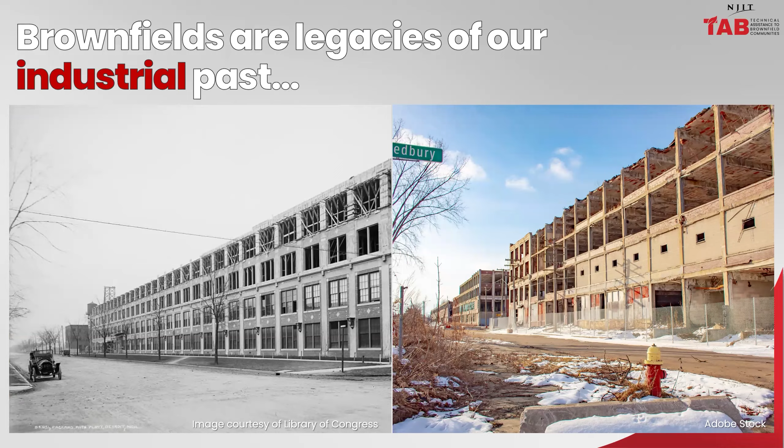Brownfields are legacies of our industrial past. Typical brownfield sites include historic factories and warehouses, former textile mills, mills and foundries, rails and freight yards. That said, non-industrial brownfield sites can include closed gas stations and auto repair facilities, former dry cleaners, and dump sites. These smaller businesses also use and handle chemicals. Buildings can also be considered brownfields based on the nature of the materials used to build them, such as asbestos or lead paint.

Let's briefly talk about the negative impacts of brownfield sites, outside of the potential presence of contamination. Of course, environmental exposure to contamination can degrade soil, water, and air quality, and human exposure can potentially cause public health issues. But brownfields can also contribute to neighborhood deterioration and negative perceptions of the neighborhood. They can attract vandals, open dumping, or other unwanted criminal activity. They can lower property values, reduce employment opportunities, and lead to lost tax revenue and limited economic growth.

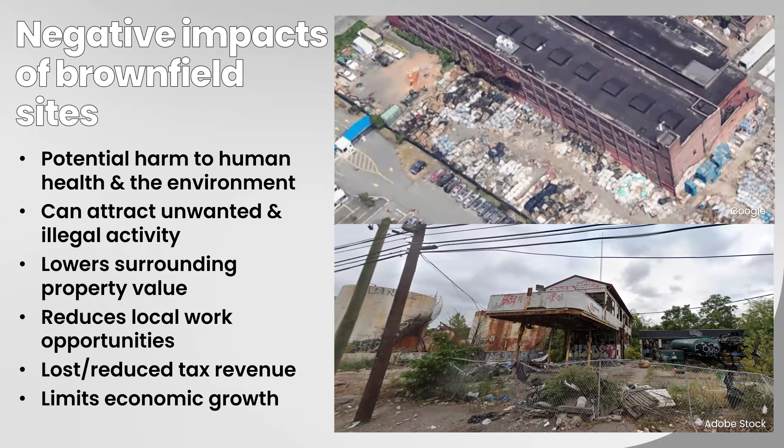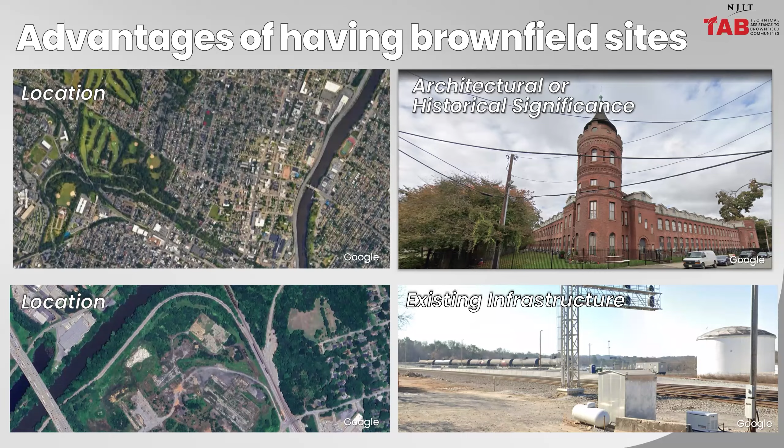Most of all, brownfields hold the potential for being transformed into community assets. Remediation and redevelopment of brownfields present us with opportunities for renewal.

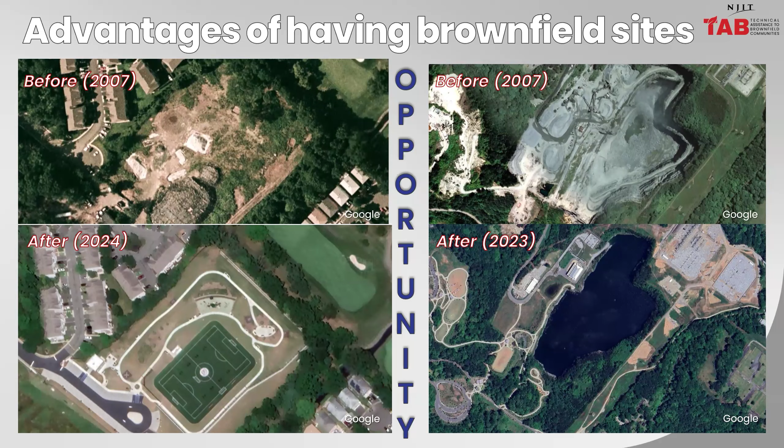A greenway is generally a linear park or open space corridor that links natural, cultural, and scenic resources. Greenways are found along rivers and on former rail lines. In addition to conserving land, greenways can also promote recreation through walking and cycling that encourages folks to get outside and be active. Environmental benefits of greenways include improved air and water quality. Rails to Trails projects, which convert abandoned rail lines into recreational pathways, are popular across the country.

To tell us more about their Greenway projects, let's kick this conversation over to our panelists.

It's my pleasure to briefly introduce today's panelists in the order that they will be presenting. Julia Wong works in the Office of Urban State Parks and Initiatives at the New Jersey Department of Environmental Protection, where she manages and supervises the planning, design, and construction of the state's newest park, the Greenway. Additionally, Julia supports the Liberty State Park revitalization efforts.

Christine Hassell is the Chattahoochee Program Project Manager for the Trust for Public Land. Currently, she is managing the development of the Camp and Paddle Trail, connecting 48 miles of the Chattahoochee River through 5 sites. When complete in spring 2025, the trail will provide a unique 4-day, 3-night recreational experience through the southern Atlanta metropolitan area.

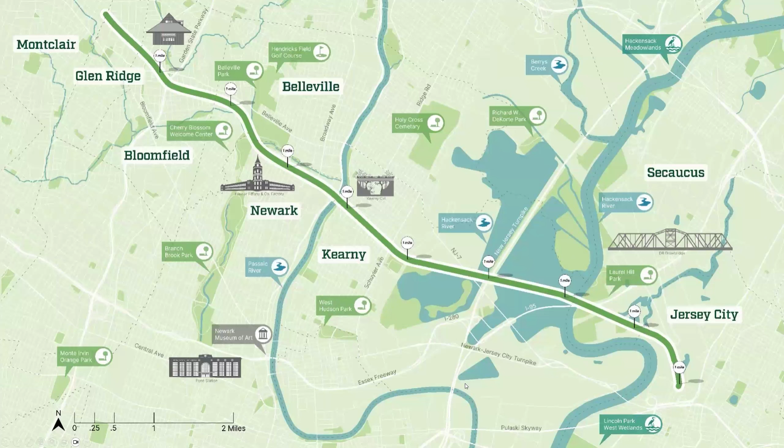To ground you a little bit to where we're working right now, the Greenway Future State Park is converting an old rail line into a greenway, as Carrie mentioned. From west to east, it'll run about 9 miles through 2 counties and 8 municipalities. In total, once we rebuild and remediate everything, we're looking at approximately 140 acres of brownfields to be transformed into open space for active and passive recreation.

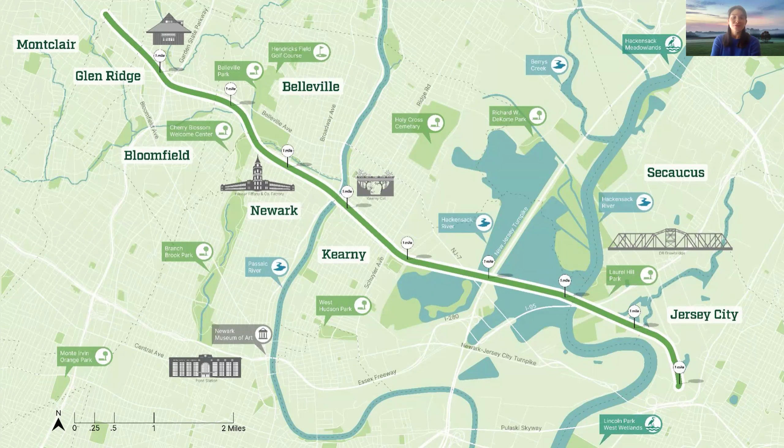This area specifically will serve 1.5 million people directly in the immediate surrounding area. But like all of our beloved state parks, we expect many more visitors to come. These 2 counties are among the most densely populated areas in our state, and New Jersey is the most densely populated state. Between the outdoor recreation and alternative transportation opportunities this will offer, we will service over 16% of New Jersey's population within the immediate surrounding area. Also, this brownfield redevelopment will serve as a catalyst for both environmental improvements and economic development in all of the adjacent communities.

So quickly, a bit of our history. DEP purchased this alignment from Norfolk Southern in August of 2022 for just over $60 million using a combination of federal and state funds. This absolutely would not have been possible if it hadn't been for all of our partners working on this, advocating for it for years before we were even involved. From local politicians all the way up to the state level, we have nonprofits, philanthropic organizations, local businesses, anyone you can name, even the Girl Scouts, clamoring for something to be done with this brownfield site to redevelop it into an asset. So we were blessed with the opportunity in 2022.

We very quickly got to work in 2023, starting research, analysis, and our initial engagement. From that work, we came out with 4 reports: one focused on remediation, another on stormwater, one on safety and security, and the last one focused on phased development for how to tackle those 9 miles while staying actively engaged with all of our stakeholders and communities. Building from those 4 reports, we ended up picking what will be phase 1 and moved into design and engagement at the end of 2023, which is where we are now.

Engagement continued throughout that process and still actively continues, though we're at a bit of a pause as we, fingers crossed everybody, hopefully break ground this summer. Very excited for this to start taking place. As of now, we're expecting it to take 15 months to complete what will be phase 1.

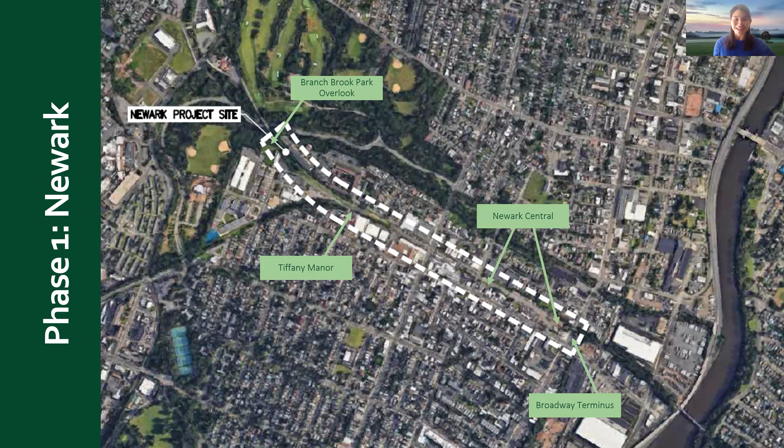Going through there, we've got a quick look into what is leading into our design ideas. As this was a former rail line, we wanted to keep the history of its decades of use and pull from the actual site itself—looking at the rail ties, the Corten steel, and the fact that as a rail line it carried ice from farther in New Jersey into people's homes in the pre-fridge and freezer days. From that, we developed a design language marrying ice, rails, and ties with the interplay of how humans and nature always interact, because you cannot separate the two.

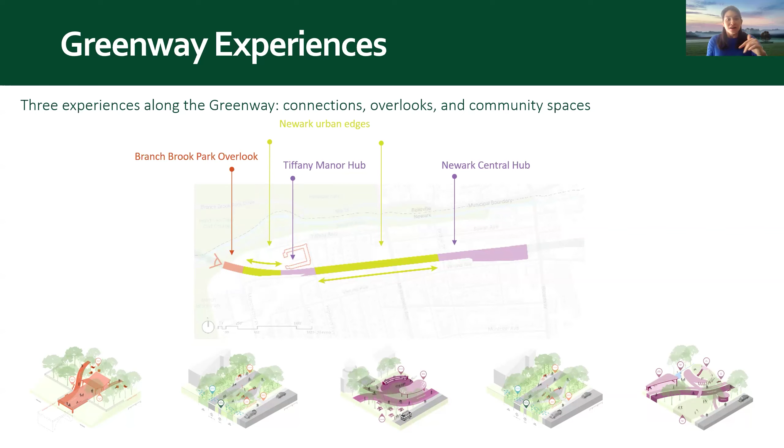With that, we created a series of Greenway experiences: connections, overlooks, and community spaces. I'll move into these a little more closely. Connection is exactly what you think of when you think of a trail—not to put too fine a point on it, but it takes you from point A to point B.

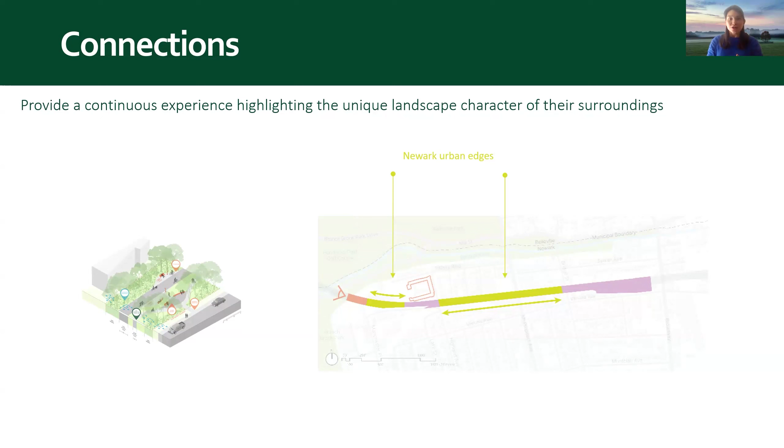And while there is intention in the design, it is largely one shared use path for bikes and fast moving people who run significantly faster than me, and a slower moving path for where I'll be hanging out, walking slowly with my dog. That's not to say there isn't other investment - there's stormwater management, reestablishment of local vegetation, flora and fauna, but it is largely a connector.

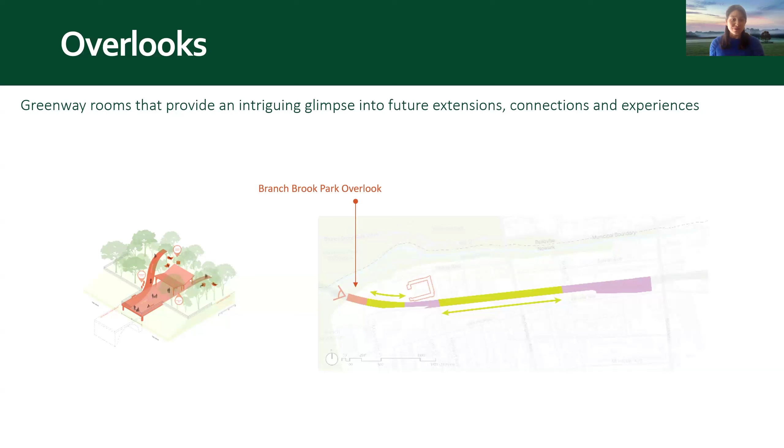The purple side are community spaces, of which phase one has two. Tiffany Manor would be that building that Carrie showed towards the beginning, and we heard from tons of local people that they needed a place where they could hang out and grab a coffee with their neighbors, sit down and enjoy the day before it gets started. It's a wonderful little hub of a space that connects a deeply residential area with a local supermarket, an elementary school one block off the road, and is incredibly well traveled.

Farther east, we have Newark Central Hub, which is by far and away the biggest investment we will put in for the entire Greenway. You can see how much wider it gets the farther east you are, and then it substantially narrows again for the rest of the Greenway. So that is our biggest opportunity for all sorts of programming - social, cultural, and recreational.

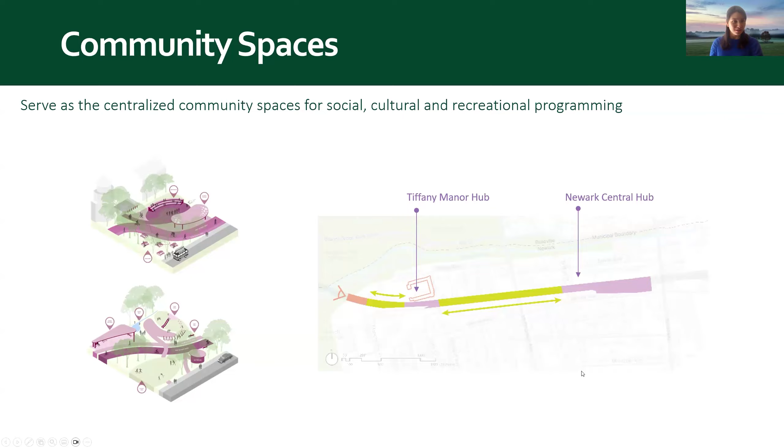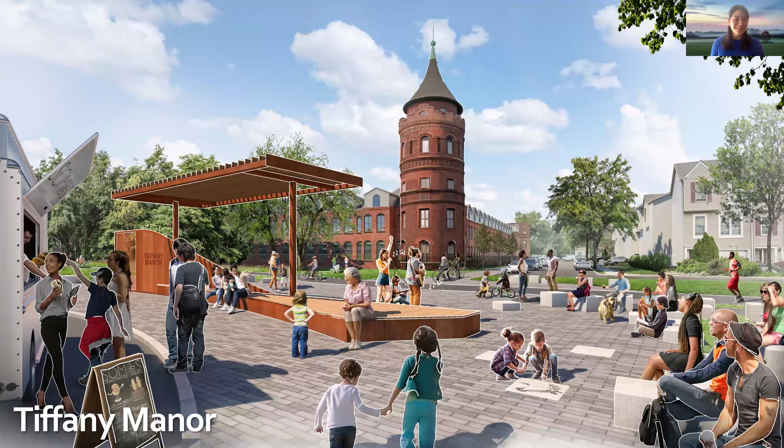Our next rendering is of Tiffany Manor. That iconic building is Tiffany & Co.'s old sterling silver factory - they manufactured silverware there for the longest time, and it's since been converted into lovely residential apartments. I would love to go into that turret - maybe one day I'll get an invite. But as I'd mentioned, this is an area where residents really wanted a place where they could come and sit down before they start the day, or come and take lunch, that sort of thing.

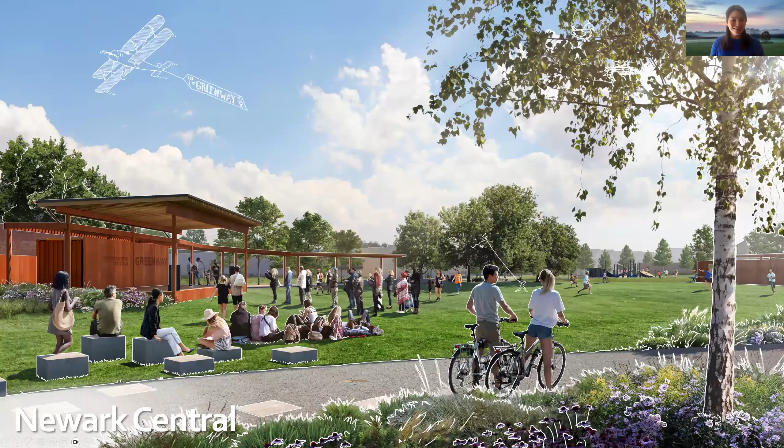And then Newark Central - this is one of many renderings that we have, but I had to pick one. A view of what we've been calling the Great Lawn, and the seating capacity, depending on what studies you're looking at, it either fits a couple hundred people or up to a couple thousand, depending on if it were a more concert style thing with a stage as well. So think local programming - that could be a Friday night concert series if the city would like, or the community would like. You could lead yoga classes or just picnic out there with your family all day, which is amazing.

But because Newark Central is so vast, I included a couple more renderings of other things that are happening in the area.

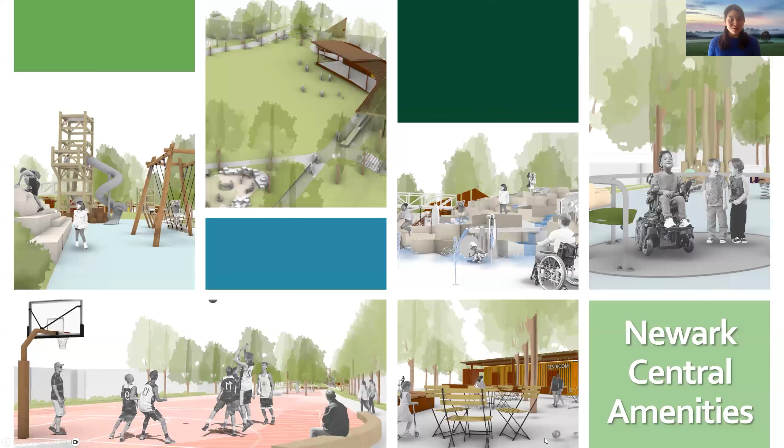So we have two separate play areas, one designed more towards older children, ages 5 to 12, and then younger kids 2 to 5. All of the design features are lovingly, painfully designed to keep in mind the old rail and ice infrastructure. That's an old ice tower we're trying to model for that climbing feature with a slide. There's also, connecting those two play areas, a climbable water play feature where kids can redirect water streams. All of the climbing blocks are modeled after the ice blocks that the rail line used to carry. There's also a series of sports courts, workout stations, an area for a future community garden, picnic grove, restrooms, all that sort of thing. Really, really fun - a lot of thoughtful design.

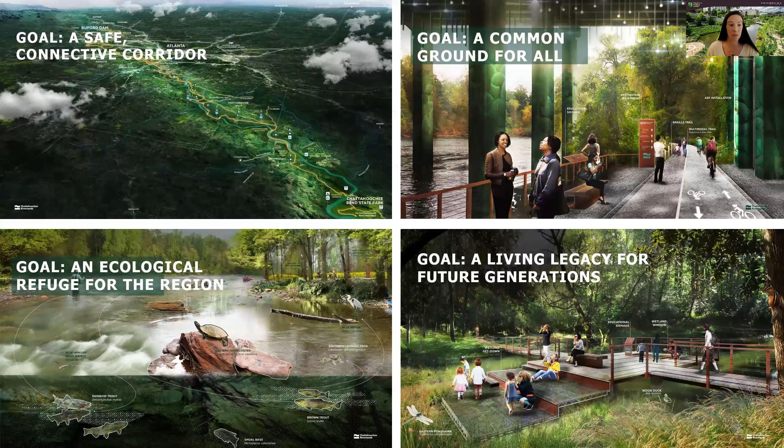That got us to identify 4 goals along the Chattahoochee Riverlands: to create a safe and connected corridor, to create a common ground for all, an ecological refuge for the region, and a living legacy for future generations.

These 4 goals informed the vision then, and they still inform all of the decisions that we are making today during implementation.

So what is the Riverlands really? The Riverlands is the Greenway, which is really what I'm here to talk mostly about today. Think of it as a 100-mile linear park, if you will, but it's the Greenway. So this is the trails along the river, one side or the other, sometimes both, and then the destinations that the Greenway creates, that those trails create.

The Blue Way, thanks to Mother Nature, was actually an easy one to check off as complete. The Blue Way is the river itself, a Blue Way trail along the river. The Riverlands identifies more places to access throughout the 100 miles. The tributary trails are essentially the trails that get folks from where they live and work to the river to play and recreate. So all of that makes our Chattahoochee Riverlands.

This study was published in 2020, and the full alignment is 125 miles of trails, 25 river crossings, 44 tributary trails, just a lot of access to this terrific natural resource. And so far today, since the published study in 2020, we have tracked over $267 million that have been invested or committed to the Riverlands projects. These are 2024 numbers, so we don't even have any more recent figures, at least not in this version of our graphic.

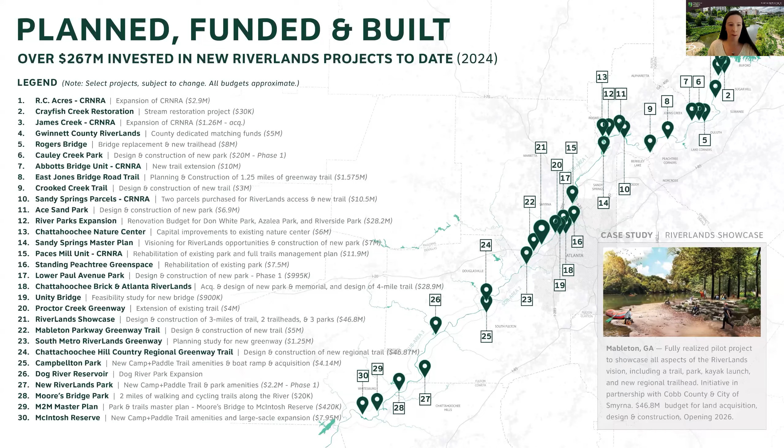So I'm going to focus a little bit more now on actually building the Riverlands and getting us closer to seeing this vision realized. As you can imagine, not everybody can flip through a book or talk about a vision and knows really what that looks like on the ground. So here in Georgia and in the Atlanta metropolitan area, we do talk about the Riverlands trail portion, the Greenways, as the BeltLine, but on the water.

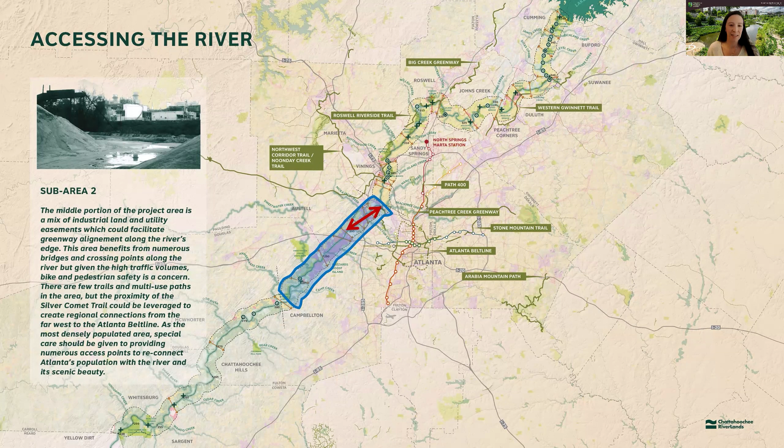It's the highest impact of creating the trail network and park along this section of river, and a lot of these sections are not heavily funded as well. So Trust for Public Land, along with a multitude of partners, are working on this section of the river. And then the City of Atlanta, our terrific partner, we are focused on our Cobb County side, our City of Atlanta side, and some of our jurisdictions a little bit farther south. This urban core has a large industrial use along this section of the river, very urban, a little gritty.

Historically, people turned their back on the river in this area, and most of these industrial sites were just dumping into the river. That's part of the reason that we ended up having one of the most endangered rivers in the United States. Now, the trend is seeing a lot of these industrial sites turn to residential, amenity, or park use. So we're seeing a lot of that already happen.

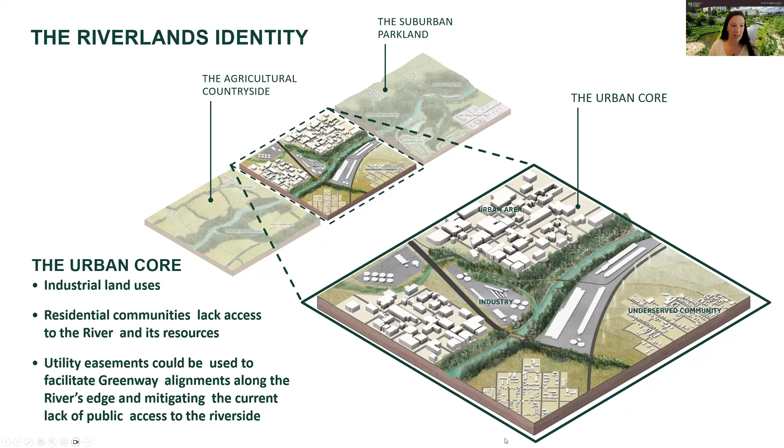But in some areas, there still is a lot of fencing and utility corridors that people cannot access, a lot of rail lines to get across as well, just to get to the river, which you can see, but you can't actually access. So this is our focus study in the urban area.

One of the primary locations that Trust for Public Land has been working in, we call the RiverLands Showcase Project. It is about 3 miles of greenway, anchored with a park and trailhead at the north end and a park and trailhead at the southern end that you can see here.

This project will be complete—we are underway, it will be complete in 2026. As I mentioned, it's about 3 miles of paved trail, providing access for everyone so everybody can access the river. The wonderful thing about this, it runs through Cobb County, City of Smyrna, and Mableton, connecting 3 jurisdictions directly. And we're able to utilize the utility easements and corridor through a lot of this, which makes it a lot easier to get access through this section of the river and build out beautiful trails.

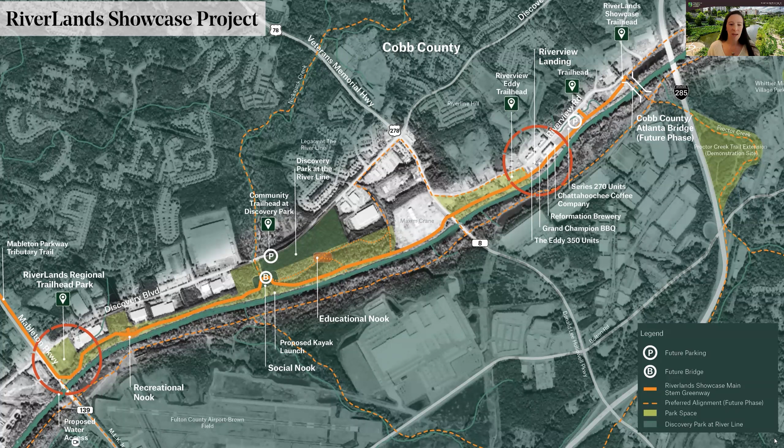As I mentioned, we are looking at sections where we get the highest impact for the investments that we're making. This showcase is located near 44,000 Metro Atlantans. We've already conserved and activated hundreds of acres of land along this stretch.

And we've seen a lot of community volunteerism, bringing them to the river to help us remove invasive species, to talk about the river, to talk about stewardship, but also to help build the investment here to date. So far, we have received over $26 million in public funding and a philanthropic investment of $23 million committed by TPL. And again, this project has started opening.

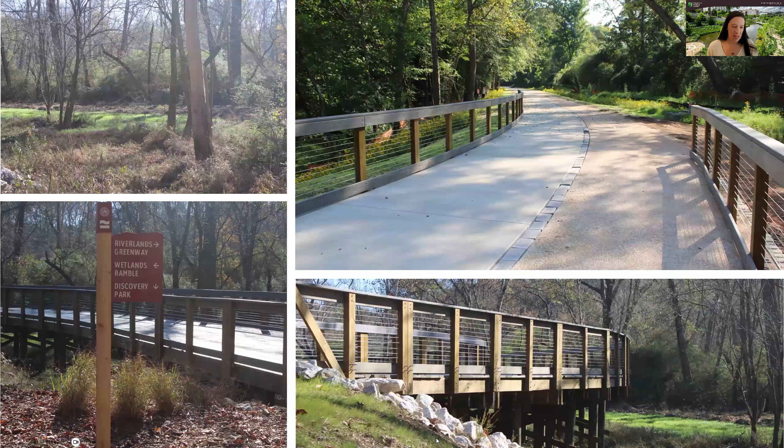Let's see, and then just some more photos where the trail comes together. This is actually a bridge in the top right, and through most of these photos you can see the boardwalk that runs over the wetland that is also being restored at this site as part of that ecological refuge for the region.

All right, so I'm going to turn your attention to the other side of the river, which is Atlanta's waterfront. TPL is working with the City of Atlanta and a lot of other partners to make progress on Atlanta's 5 miles of riverfront, which has been called the Atlanta Reach.

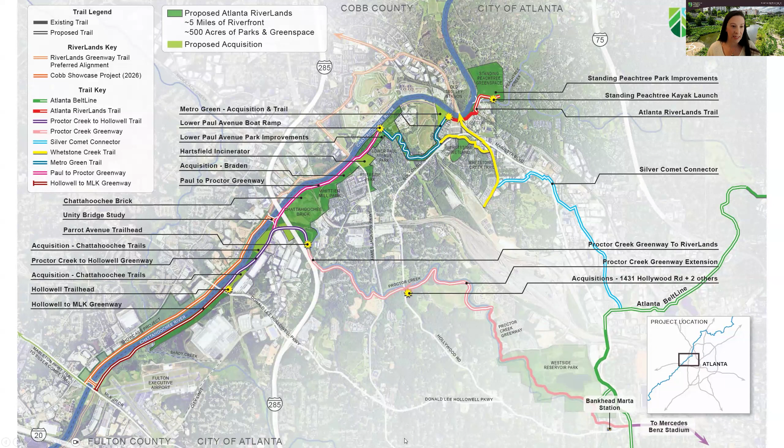So I just want to highlight quickly, if I can, I'll try and get through these slides. Again, the Atlanta RiverLands trail design is underway for this 5 miles. Very excited to see this moving forward.

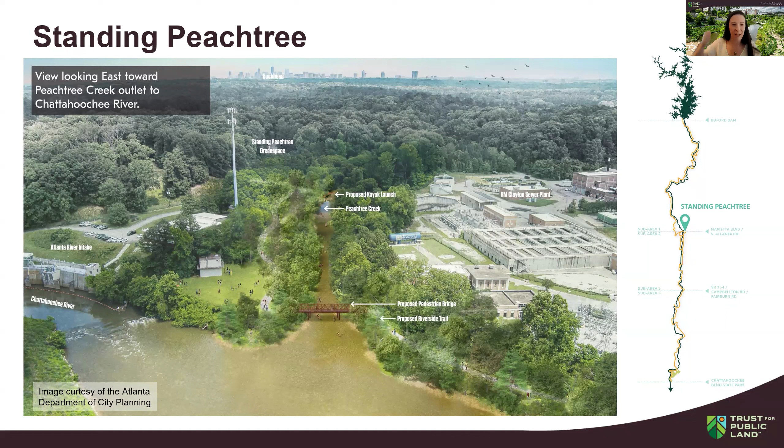Standing Peachtree, as I mentioned, this is looking from the river up Peachtree Creek, which is the confluence of the river and Peachtree Creek, and you can see the city skyline in the background. There's the kayak launch, and then the trails coming online in the near future - there will be a bridge over Peachtree Creek connecting residents of the city of Atlanta to the riverfront.

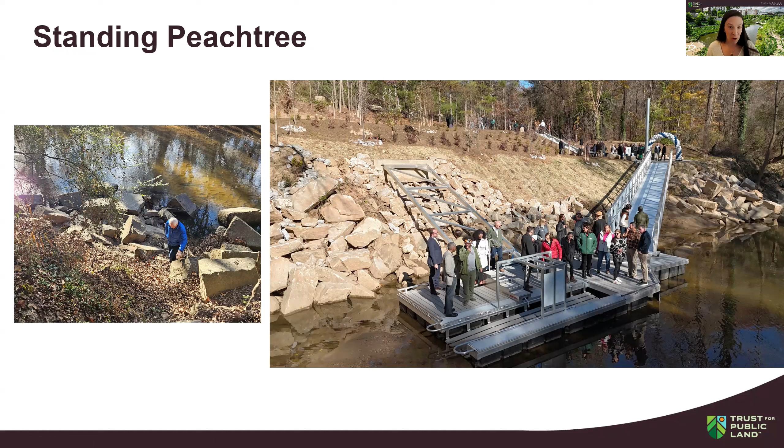So again, this connects everyone and makes sure everyone has access to the outdoors and to the river via this access, no matter your age, your ability, your race. This really gets everybody down to the water, or in the water if you want to paddle a boat or a canoe. And then again, this trail looking down with the city of Atlanta behind.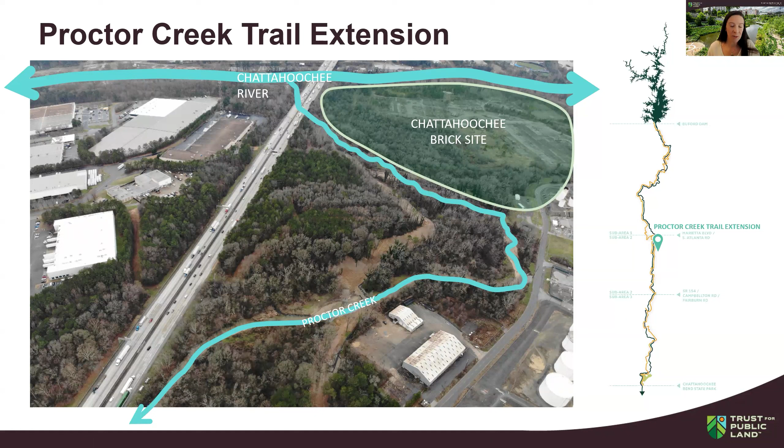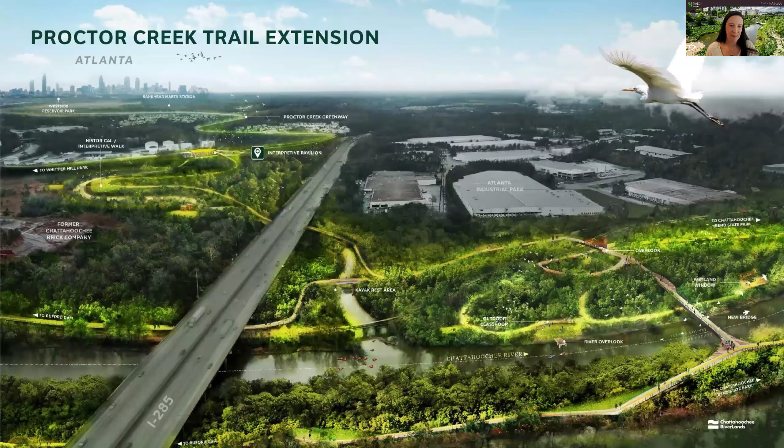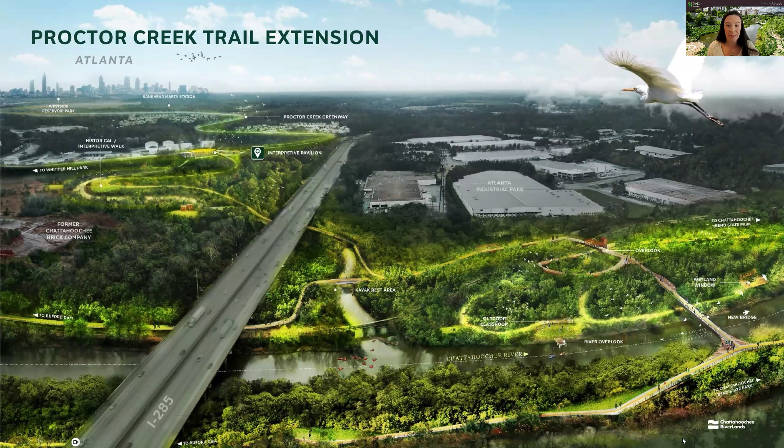So now we flipped it from how I first oriented you to the site. The river is at the bottom, that's 285 running bottom to top, and then Proctor Creek snaking through with a bunch of trails, a beautiful rendering of what we can really do with these sites and this great partnership that Trust for Public Land and the City of Atlanta have been able to create.

I just want to highlight again, this is the last rendering I'll show and then I'll pass it off to Jessica. Really, the Chattahoochee Riverlands, we see it as on track to become one of Georgia's defining public spaces for generations to come, drawing a regional audience and connecting millions of people with a vital natural resource. Greenways along 100 miles of the river, it's going to be quite lovely. We would not be able to do what we're doing without the amazing partnerships that we have, and I'm going to hand it off to Jessica, as she has been a terrific partner in making progress on this.

Thank you so much. My name is Jessica Lavandier. I work with the City of Atlanta Department of City Planning and the Office of Zoning and Development, and I manage the Brownfield program. Let me see if I can move this down.

So as I mentioned, I manage several EPA grants: Brownfield grants, revolving loan fund, where we provide financing for brownfield remediation by providing a loan or sub-grant to remediate a parcel; assessment grants, where we conduct a phase 1 and phase 2 environmental assessment and cleanup planning for parcels; and a cleanup grant, which is for a site owned by the city, in this case our Chattahoochee Brick site.

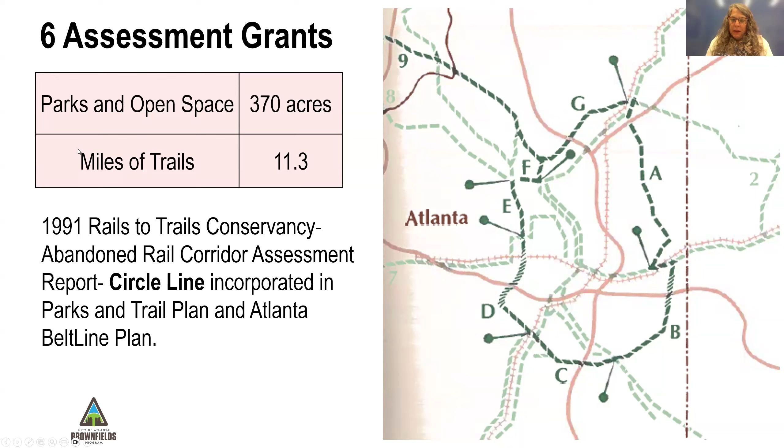That was incorporated into our Parks and Green Space and Trail Plan, and later into the Beltline Redevelopment Plan. An agency was created to implement and build the 22 miles of trails around the city. Our Brownfield program was starting around the same time, so we did a lot of work along the Beltline. I have 3 projects to focus on to show you.

The next one is a gas station. We conducted a phase 2 environmental assessment on a gas station and an auto repair shop. We removed 3 tanks and fuel lines, conducted sampling underneath in the soil, did the closure report, and received a no further action letter so that this parcel could be used as an access point from the neighborhood to the Beltline, which is located below grade.

Some things take a long time. We did this work in 2016, and finally the Atlanta Beltline is opening this access point this spring. I'm really excited to finally see this site redeveloped.

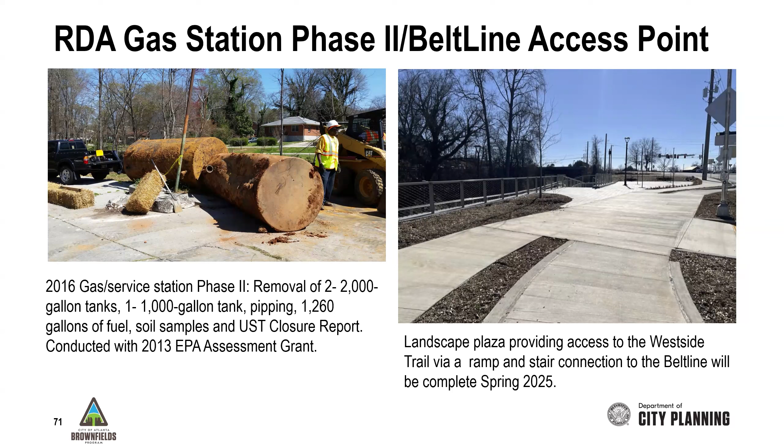The next one is a rail corridor the CSX abandoned. The City of Atlanta purchased it and worked with the Beltline and the Path Foundation, a nonprofit that builds trails. So we conducted the phase 2 - the largest phase 2 I've worked on, a 31-acre rail corridor, which was challenging because some of it is elevated and some of it is below street level.

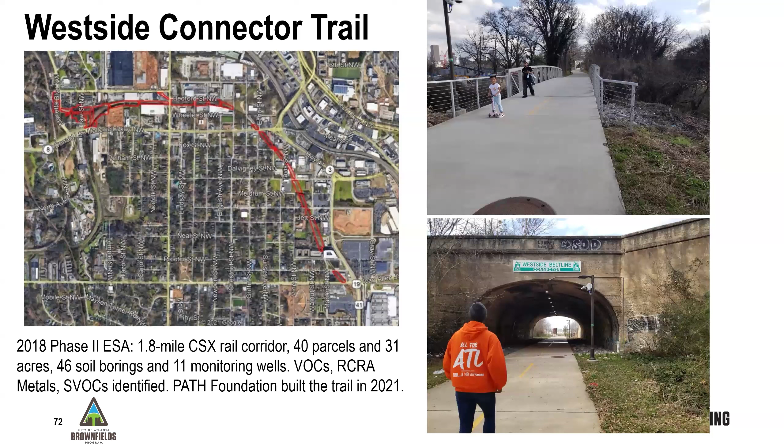And the Path Foundation built and opened the trail in 2021. So we have some before and afters here.

Now I'm going to focus on the Chattahoochee River. The Chattahoochee River is really inaccessible to most people in the Atlanta region, and we've had many plans over decades trying to improve access to the river. This one is from 1994.

This was a partnership with the City of Atlanta and Fulton County on a 12-mile corridor. We partnered with PATH and Trust for Public Land even back then, and there were several key recommendations on how to improve access. One recommendation was to build a demonstration project, which included a 1-mile segment in a new park.

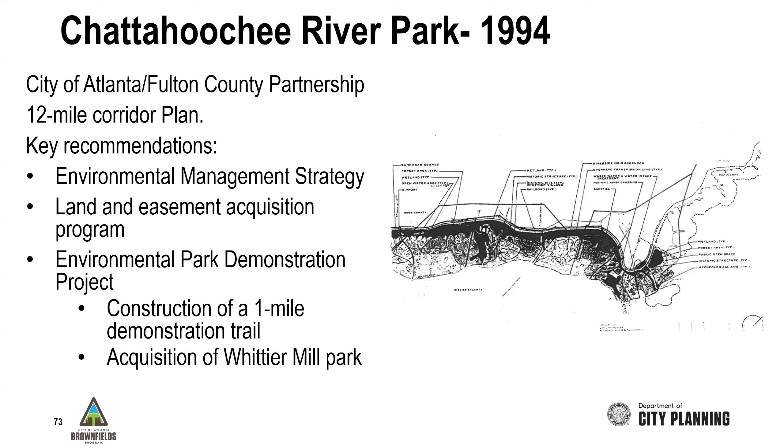Along the river, the demonstration part was built - this is the 1-mile segment of trail built along a City of Atlanta water treatment facility. It was closed for a while, but now we are reopening that segment. It was being refurbished here.

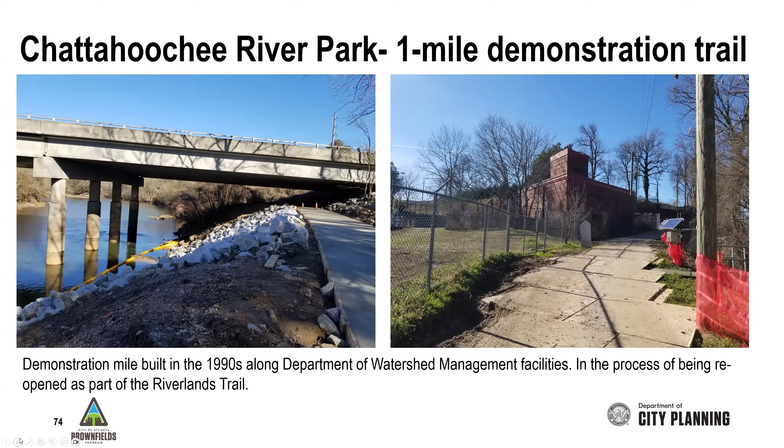And then the next one is the Whittier Mill Park, a 22-acre site where a former cotton mill was located, adjacent to the Chattahoochee River. So that park is there.

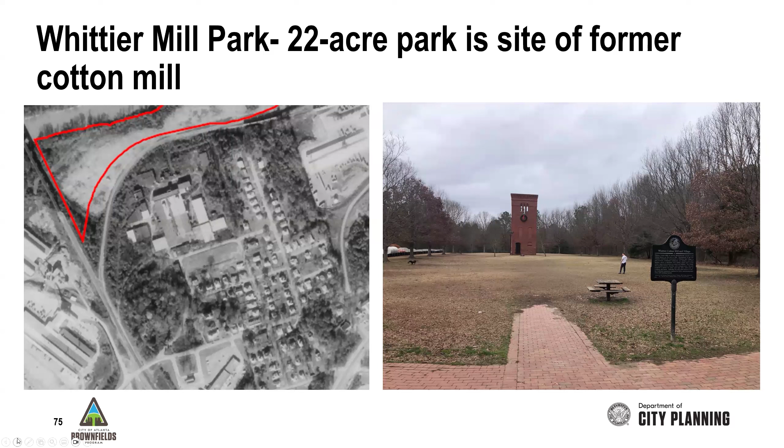Another plan I worked on was a partnership between Cobb County and the City of Atlanta along the Hollowell corridor, a state highway. The boundary for both is the Chattahoochee River, so we saw that as a place where we both could come together. This was funded by the Atlanta Regional Commission, our 10-county planning agency. The plan recommends parks, trails, and pedestrian bridges over the Chattahoochee River.

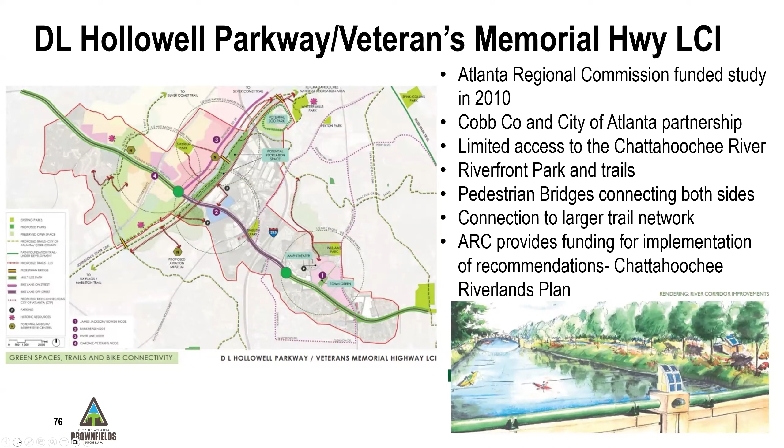Years later, we applied with TPL and Cobb County on a planning study to look at how to bring that park and trail into reality, and we expanded the scope beyond the study area to that 100-mile corridor. The idea of a Chattahoochee trail and park is also in our parks plan, our Activate ATL from 2021.

The City of Atlanta is a very forested city, and we seek to protect 50% of the city with tree canopy. We're trying to protect our natural areas and wildlife habitat. We also want more extensive trail connections to bring people from where they live and work to a park, and we want to increase accessibility by having a 10-minute walk. All of those are important elements that come together in our Chattahoochee River Atlanta Reach project.

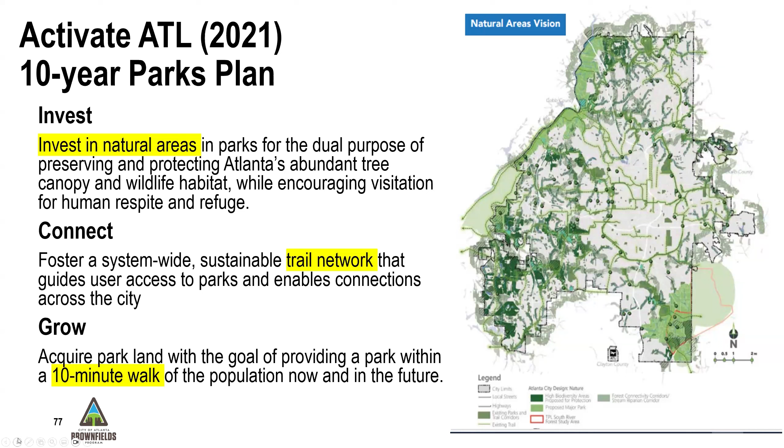So I'm going to focus a little bit more about brownfields. In our grants, we have target areas where we invest EPA grant funds, and one of them is our Groundwork Atlanta. The Groundwork Atlanta has the frontage on the Chattahoochee River, and with one of our assessment grants, we did a survey of potential brownfield sites along in that groundwork, and we identified several that you see here in the map, several of them along the Chattahoochee River.

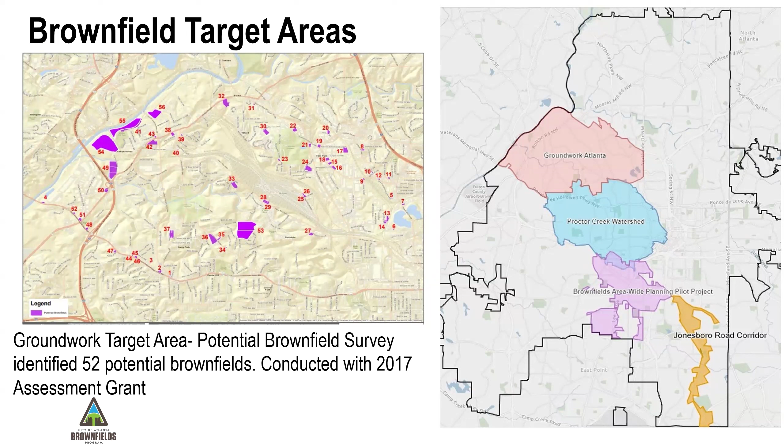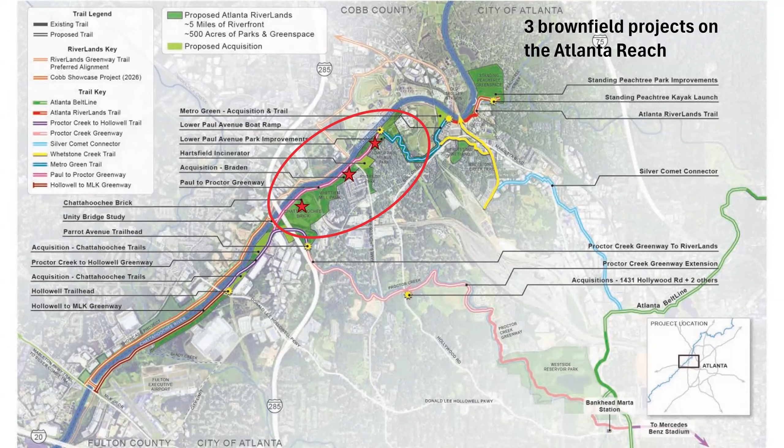So I'm going to talk about 3 specific brownfield projects in the Atlanta Reach, as highlighted here. The first one is our Paul Avenue Park - this was a parcel, or 2 parcels, that are part of a future park.

A couple of decades ago, an industrial operation dumped barrels with contamination on the site and contaminated the soil. The Conservation Fund is our partner in acquisition of parcels that will become parks and open space. As part of their assessment, they identified lead and chromium contamination, and we provided them with a grant to remediate the soil - they excavated 800 tons of soil. Here you can see some of the crushed drums that were excavated.

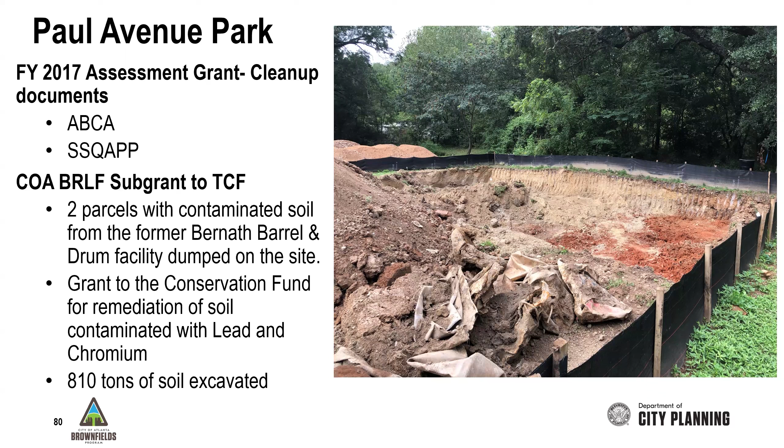This is right near the Chattahoochee River, and we had extensive flooding in 2009, and several residential parcels were flooded. So the idea was to purchase those homes and create this new 6-acre park.

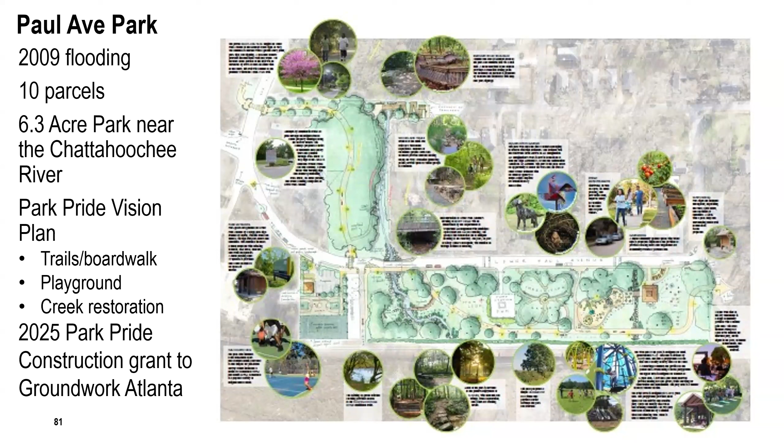After the site was remediated, Park Pride, which is a park nonprofit, worked with the neighborhood on this visioning with trails, creek restoration, playground, and also provided funding to Groundwork Atlanta to start construction of some of those park elements. We're excited to see this come to reality.

Next, I'm going to talk a little bit about the Chattahoochee Brick Company. In the 1880s, this company located along the Chattahoochee River because it had clay and water needed for the production of brick, but also was along the rail line, so all the materials it needed and the bricks that were built could be shipped to their destinations.

Right after Reconstruction, a lot of southern states and municipalities started passing laws that criminalized behavior that wasn't criminal prior to that. So a lot of people were being arrested and convicted of crimes, and fined. When they couldn't pay their fines, a company would pay the fine, and in return, the person would have to work at that industrial operation. This is called the convict leasing system.

At Chattahoochee Brick, the owner owned thousands of leases. About 175 to 200 people worked there, producing 200,000 bricks per day, an enormous quantity. There were a lot of investigations because of the mistreatment, abuse, and malnourishment of workers. In the end, in 1908, the state of Georgia abolished the convict leasing system and moved to what they called free labor, so they paid people to work there.

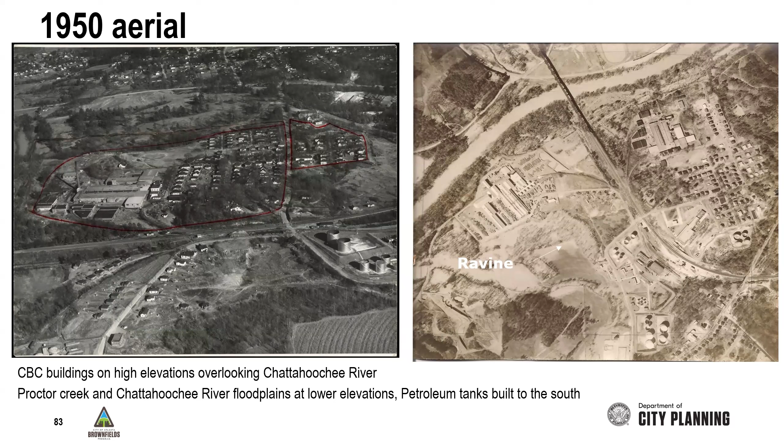In the next slide, you'll see this was a big change in the footprint. They did a big expansion and built 308,000 square feet of new building. In order to do that, they removed the trees and brought enough fill, about 35 feet, to fill that Proctor Creek floodplain so that it would be level, and rerouted Proctor Creek. You can see the construction of 285 there, and then the Chattahoochee River. So it was a big change.

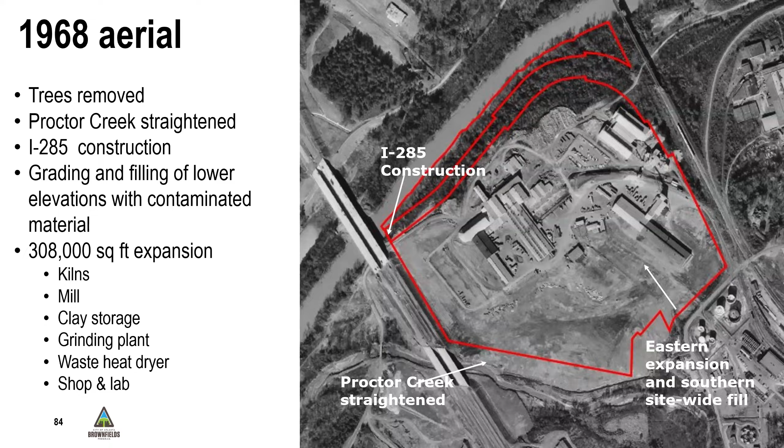Let's see if you can move to the next slide. As I said, the Chattahoochee Brick Company closed, all the buildings were demolished, and they put the property up for sale. Lincoln Terminal in 2016 proposed to build a truck-to-rail terminal with fuel tanks, those large bulk fuel storage facilities, and they needed a use permit from the city of Atlanta. There was a lot of opposition to this, and the city council turned it down. They took the city to court, and they lost.

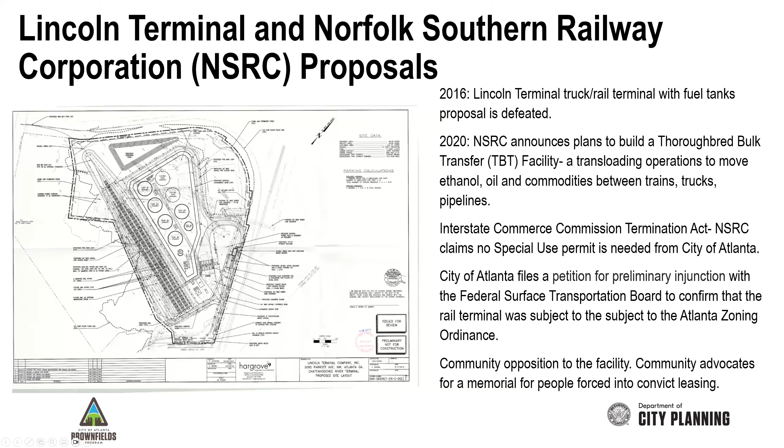Years later, they negotiated with Norfolk Southern to build another facility, what they called their Thoroughbred Bulk Transfer Facility, so they could transfer commodities between rail, truck, and pipeline, and they proposed to build this facility. They said, well, we're the railroads, we don't need the city of Atlanta permit to build this facility, we could do it as of right.

The city of Atlanta challenged their claim that they could do that. At the same time, there was a lot of opposition. The neighbors wanted to see a park, as many of the plans we have to date recommended the land along the Chattahoochee be a park. In addition, people were more aware of the convict leasing, and we wanted to honor the memory of the people that suffered under that system. So we opposed the redevelopment of the site, and Norfolk Southern relented and eventually stopped their project.

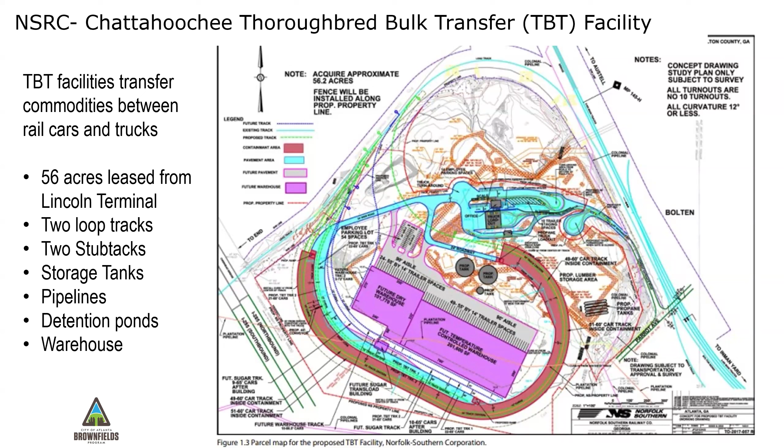But during their redevelopment, they did do a lot of environmental assessments, so they identified what they call 4 areas of concern. Two of the areas were where there was a lot of the brick operation, one along that ravine where I think they probably disposed of a lot of their waste. The 2 largest areas of concern are the floodplain, so a lot of the fill brought into the floodplain had a lot of contaminants. One thing that's pretty uniform is lead is what we call the driver constituent, so we're cleaning for lead, even though there are a lot of other contaminants present throughout the site.

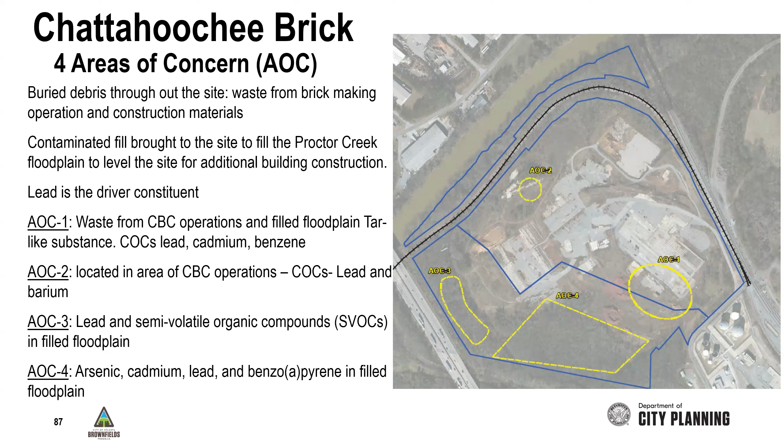So they started the remediation, and I think in the next slide you'll see that they entered the site into the Georgia Brownfield program and started the remediation. In the middle of that, they decided to abandon the project and sell to the city, but they continued with some of the remediation. In the end, they removed 17,000 tons of soil, mainly the first foot, and then put 1 foot of clean fill. They also intended to keep all of those building foundations there, acting as a cap to the contaminants on the site.

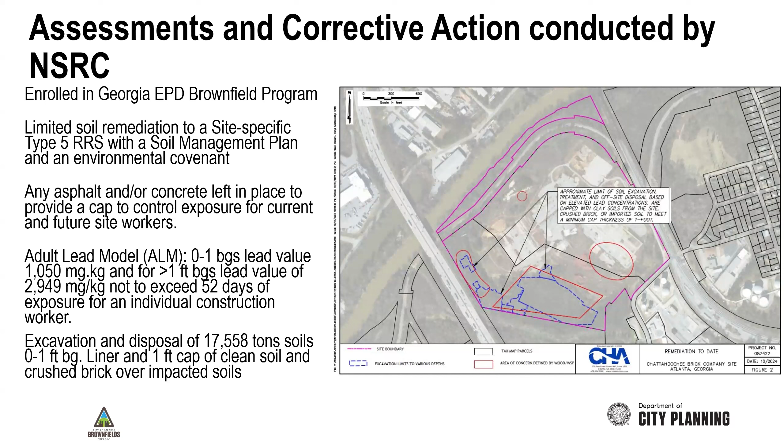So then later on, the city was able to purchase the site. We had a big ceremony. Our council member noted that we fought the railroad, the fossil fuel industry, and prevailed. And now the vision is for that site to be a park and memorial.

So it's 75 acres, and 55 acres of that is in the floodplain, most of it in the Proctor Creek floodplain, and then there's 2,000 feet of Chattahoochee River frontage. This was purchased by the Conservation Fund, and then the city bought it from them. The city had just passed a park bond in May, and in August we were able to purchase that site. During that due diligence, we had an EPA assessment grant and we did the phase 1 and phase 2. As part of that purchase, we entered the site into the Brownfield program, the city as a prospective purchaser, and we have our deadline to do the remediation by June 2026.

So that is underway. With the work that we did, the assessment, we were able to prepare and submit an EPA Brownfield grant funded by the Bipartisan Infrastructure Law, and it was selected for an award. So we have a $2 million cleanup grant. The EPA Deputy Administrator, Janet McCabe, visited the site in August, and we were there to tell our story about why this is so important for us.

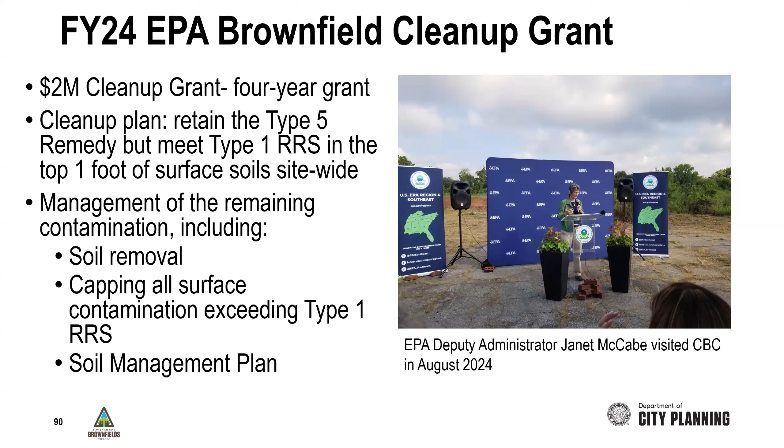So we are working to clean it up to the type 5 standard, which means that a lot of that fill will remain in place, but the topsoil, the first foot of contamination, will be removed, and we'll have a 1 foot cap, and then we'll have a soil management plan to guide any future redevelopment or construction on the site. So we still have a lot of work to do. We were fortunate to get all of the sampling data that was done and reevaluate that to compare it to our residential and non-residential standards, and develop a cleanup plan so we can transform that site from an industrial use to a park use. So this is what we're working on. Our sampling plan is coming up next.

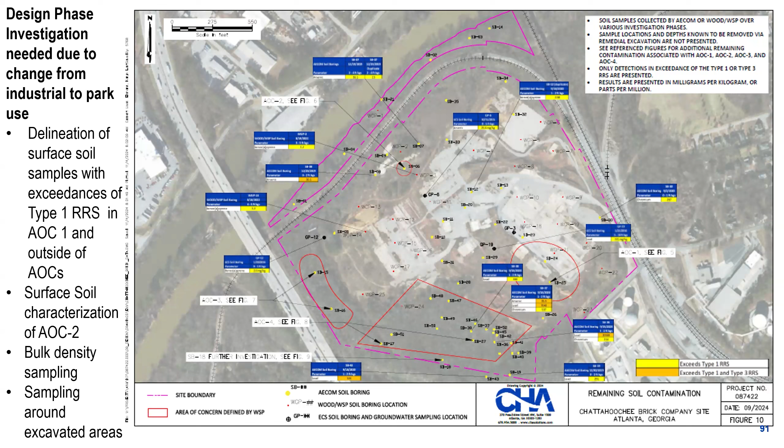This site is bound by the river and two rail lines, so it's very difficult to access. So we're doing a lot of work to do that due diligence at this point.

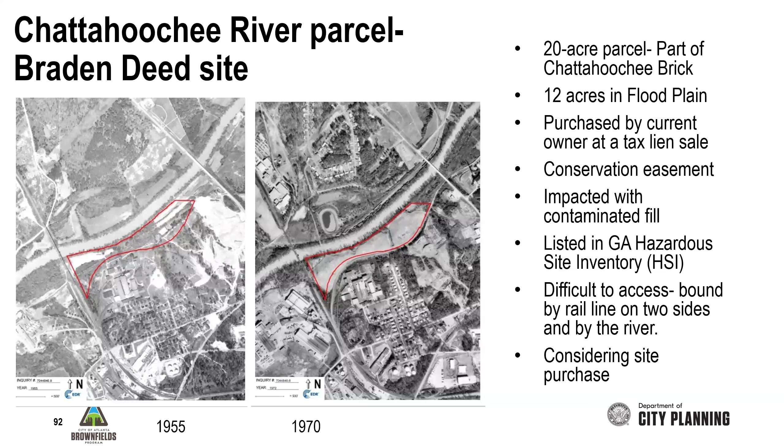You'll see if you walk this site, there's a lot of debris, tires, trash, industrial looking things on the ground, but it also has really nice views along the river. So we're really trying to overcome that so it could be used as a park.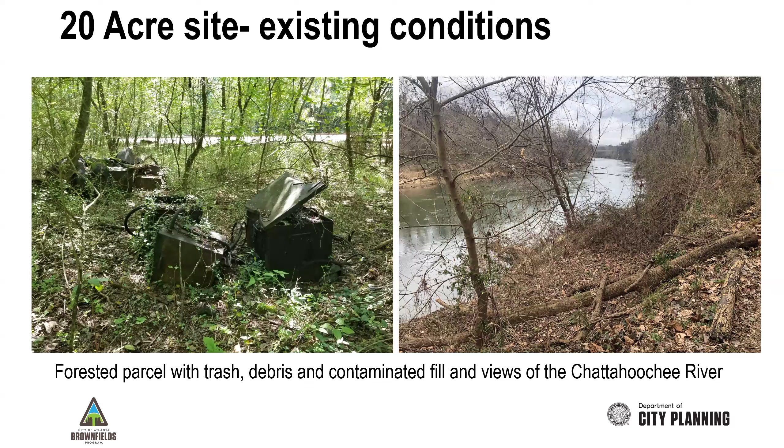We looked at the topos from the 20s before the fill, and the topos now, and estimated that about almost 230,000 cubic yards of fill was brought to the site with contaminants mixed in. So it's a really challenge for us.

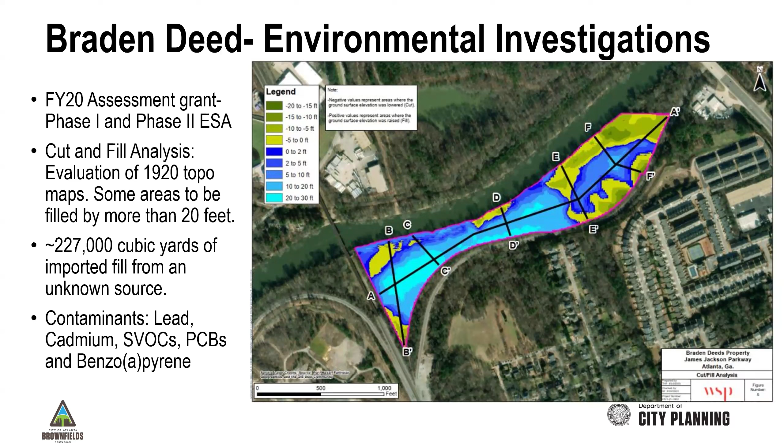The owner did an assessment, and then we've done additional assessment, and this just shows the sampling locations where we have exceedances for residential and non-residential standards.

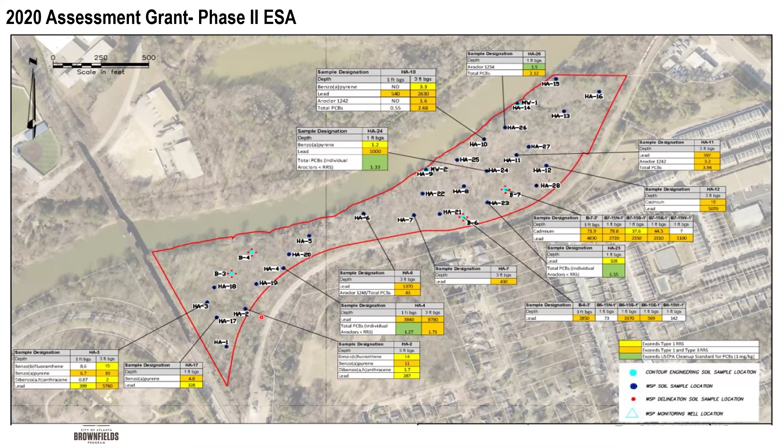As part of this, we met with EPD. You'll see in the next slide where we are looking at what the next steps are, and they want additional information to help us determine what the cleanup plan would be. So right now,

we're working to install 7 groundwater monitoring wells and 21 additional samples along the border to determine if the contaminants go beyond the parcel boundaries.

One thing that's hard, and I have to give it to the environmental team, is that it's very difficult to get rigs there. So most of this is hand augering, and with hand augering you can only go about 5 feet, so it's a lot of hand augering.

But we're working on bringing a walk-behind rig for these 7 sites. They have to be 20 to 30 feet deep, so we're working on that.

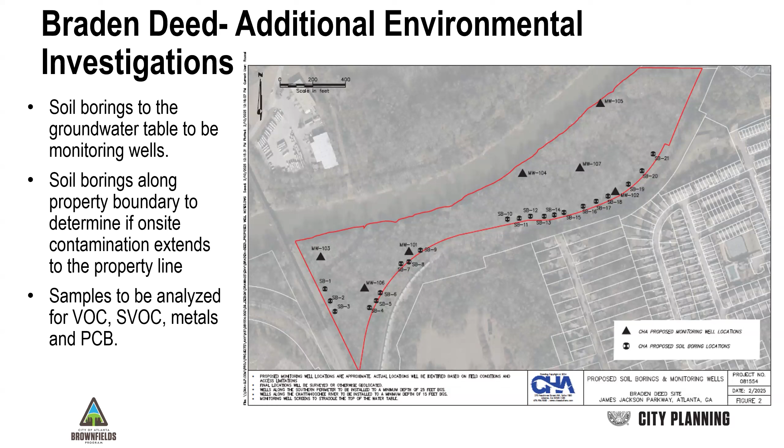We have a lot of other additional sites that we haven't even started, but to make our Chattahoochee Riverlands Atlanta Reach vision a reality, these are some of the other sites we'll hopefully be working on in the future.

One is this 14-acre parcel that was used for paperboard manufacturing and is now used for concrete recycling. It also has frontage on the Chattahoochee River.

In the next slide, you'll see the City of Atlanta has the incinerator, a municipal solid waste incinerator that's been vacant for many years, but this is one of our key trailheads for the riverfront park, so people will be able to park and use the park facilities.

Another site is a 70-acre area between the river and an industrial park, a more modern industrial park, that is impacted by contaminated fill. So we have a lot of work to do in our future.

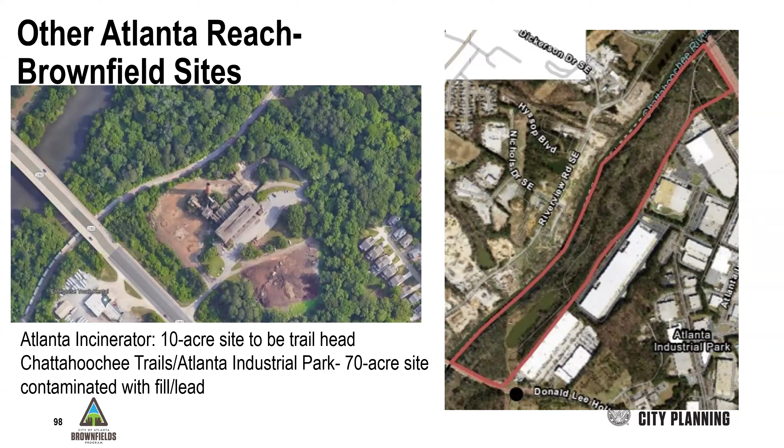We have more information about our Chattahoochee Brick site on this webpage, and information about our Atlanta Brownfield program, and then my contact information.